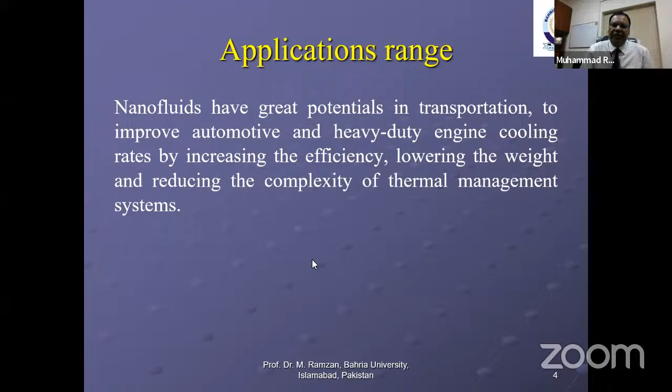If we talk about the preamble, common fluids such as water, ethylene glycol, and oil play an important role in heat transfer in many industrial processes such as power generation, heating or cooling processes, chemical processes, and microelectronics.

These fluids—water, ethylene glycol, oil—we name as the base fluids. These have relatively low thermal conductivity and thus cannot reach high heat exchange rates in thermogenic devices. So a way to overcome this barrier is to use ultra-fine solid particles suspended in these common fluids to improve their thermal conductivity. So what we actually do is put metallic particles of nano size into the base fluid to increase its thermal conductivity.

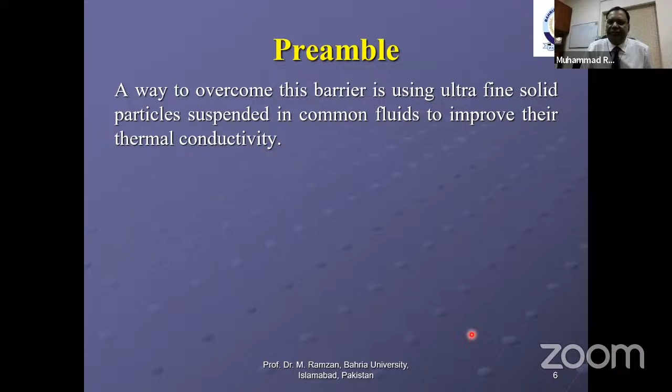The enhanced thermal behavior of nanofluids could provide a basis for numerous innovations for heat transfer intensification, which is of great importance to a number of industrial sectors, including transportation, power generation, micro manufacturing, thermal therapy for cancer treatment, chemical and metallurgical sectors, as well as heating, cooling, ventilation, and air conditioning.

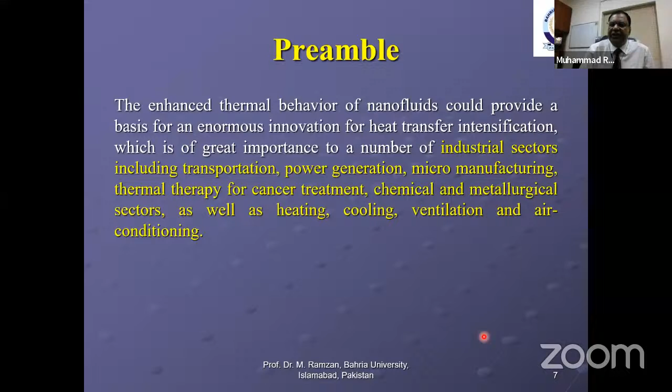Nanofluids are also important for the production of nanostructured materials for engineering of complex fluids, as well as for cleaning oil from surfaces due to their excellent wetting and spreading behavior. Another application of nanofluids is the delivery of nanodrugs.

The research opportunities in nanofluids will obviously be more attractive for newcomers who are interested in this area.

So what is a fluid? A fluid basically is a substance that is capable of flowing. It has no definite shape of its own. Both liquids and gases are fluids. Examples of fluids are water, milk, petrol, honey, and air. So in simple words, we can say a substance that has no specific shape and can yield easily to external pressure is called a fluid.

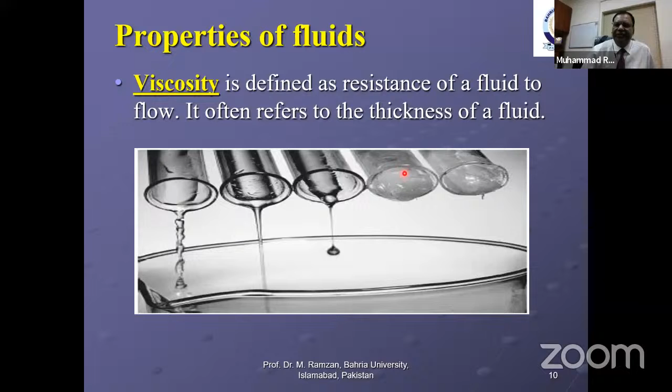Then the density of a substance - the relationship between the mass of a substance and how much space it takes up, meaning the volume. Fluids that do not mix layer themselves according to their density. Less dense fluids float on top of more dense ones. As you can see here, the oil is less dense compared to water, so it is floating on top. So an object made from a comparatively more dense material, let's say iron, will have less volume than an object of equal mass made from a less dense substance such as water.

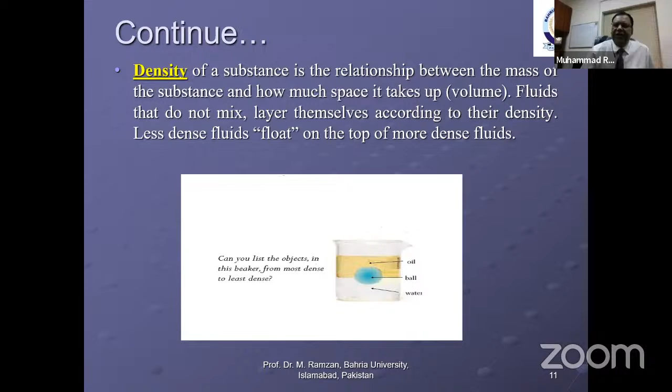Then thermal conductivity. Thermal conductivity of a material describes how well the material conducts heat. To understand this, we need to learn what thermal conduction is. Thermal conduction is a phenomenon where heat is transferred from the area of high temperature to the area of low temperature due to the motion of the constituents of a substance, such as atoms, molecules, free electrons, while the object itself does not move. In simple words, thermal conductivity is the ability of a material to conduct heat - how much heat the material can conduct. This is what thermal conductivity is.

The factors that affect thermal conductivity: first is the material - what kind of material we are discussing can affect the rate of energy flowing between two regions. From the left side, let's say if heat is moving from left to right, if the material is more conductive, the heat will transfer more rapidly, otherwise it will be at a slow rate. The length of the material is also a main factor affecting thermal conductivity. Then the temperature difference between the two ends of the material. And then the cross section type - if it's a small cross section, heat will flow more rapidly, and if it's a bigger cross section, it will be a little slower.

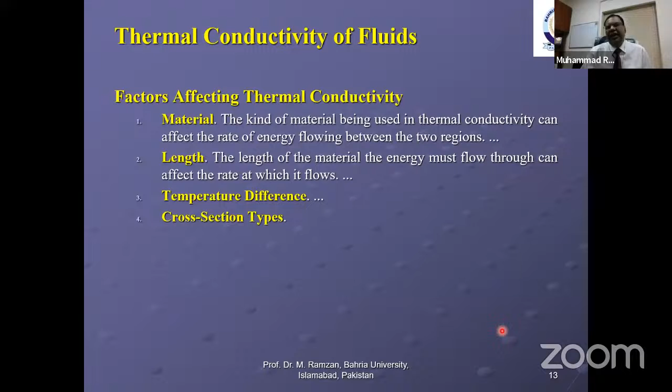So in simple words, solids have more thermal conductivity than liquids, and liquids have more thermal conductivity than gases.

So if we talk about the timeline of the emergence of nanofluids: in 1981 in America, Tuckerman introduced microchannel technology. Later in 1985, Argonne National Lab in the United States started a program to develop advanced fluids. This journey continues until 1993.

Masuda et al. measured the thermal conductivity and viscosity of three different water-based suspensions containing aluminum oxide, titanium oxide, and silicon oxide nanoparticles. They reported that both the thermal conductivity and viscosity of the water became greater than before adding the nanoparticles. This was a big success at that time in 1993 - they found that when we insert oxides or nanoparticles into the base fluid, the thermal conductivity is enhanced.

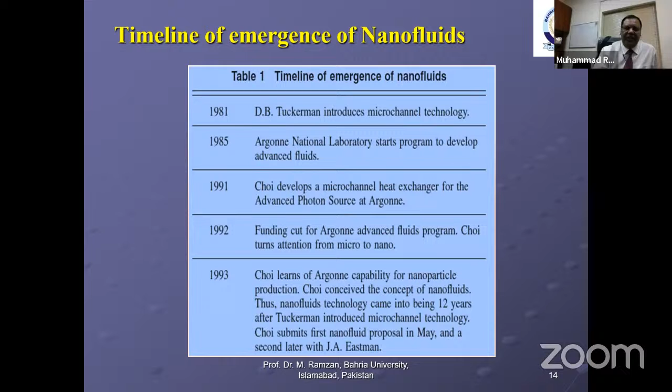This journey continues, and in 1994 to 97, a proposal leads to funding for the first nanofluid project. Then in 1995, Choi presents a seminal paper on the concept of nanofluids. And in year 2000, President Clinton announces the National Nanotechnology Initiative. At this stage, they recognized the effectiveness of nanofluids.

Based on the concept of nanofluids, Argonne thermal scientists have developed an advanced cooling technology. The approach relies on many microchannels consisting of long, narrow slits and coolants containing nanometer-sized metallic particles. In other words, the innovative process implies microchannels filled with metallic nanoparticle-laden coolant to extract heat faster than present technology.

This was a big step forward, and the year 2000 was the start of nanofluids research. Then in 2007, the first single-theme conference on nanofluids was held, which made the base for today's research on nanofluids. So it's not as old a field - from 2000 onwards it's 22 years, and if you talk about the proper start of nanofluids development, it starts from 2007 onwards.

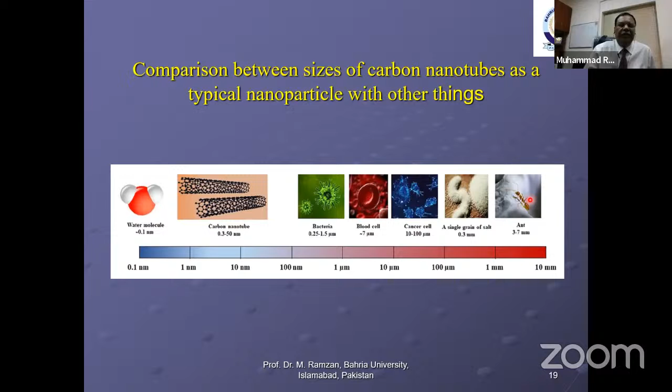As already mentioned, nanoparticles may be made of aluminum oxide, zirconium oxide, silicon dioxide, copper oxide, gold, copper, or carbon nanotubes.

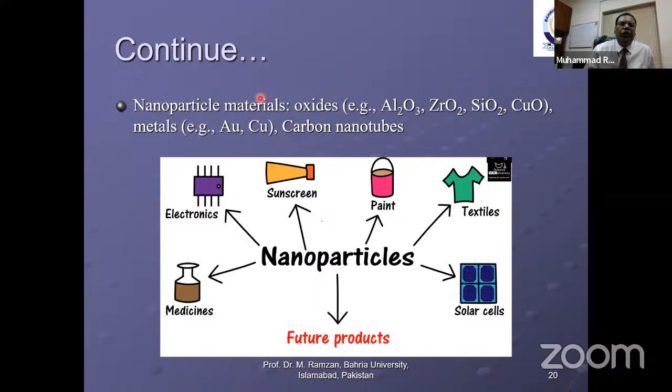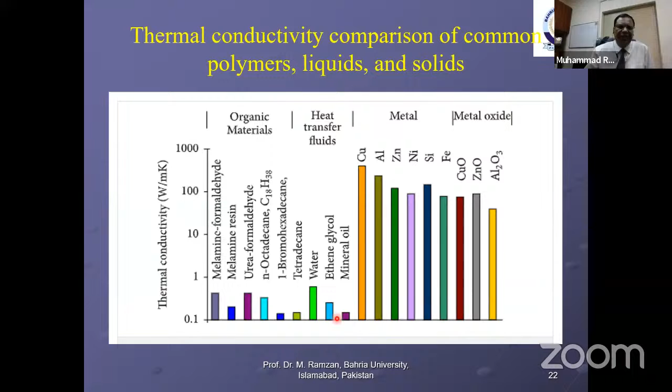You will see a similar comparison here - these are the base fluids: water, ethene glycol, and mineral oil, and these are the thermal conductivities of copper, aluminum, zinc, nickel, and the rest of the materials. So you can see a comparison of thermal conductivity.

The most fascinating nanoparticle is the carbon nanotube, made from graphene sheets. Graphene sheets are used for anti-corrosion coatings and paints, efficient and precise sensors, faster and efficient electronics, flexible displays, efficient solar panels, faster DNA sequencing, drug delivery, and more.

Here are the sheets made from graphene. The first type is named the single-wall carbon nanotube, and the other is named the multi-wall carbon nanotube. A sheet of graphene one atom thick is rolled into a tube like this, creating a single-wall carbon nanotube.

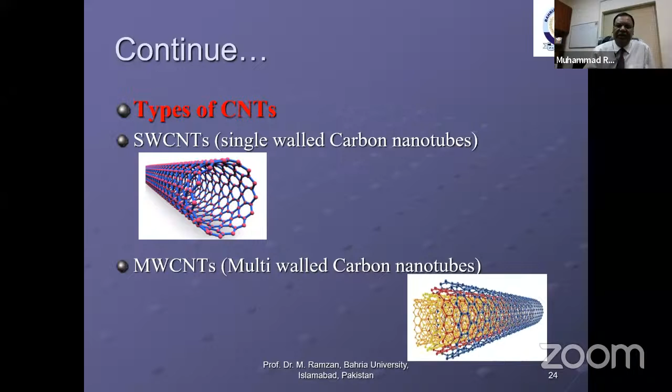The method involves combining a metal catalyst with carbon-containing reaction gases, and as a result, carbon nanotubes are formed on the catalyst within a furnace at high temperature.

The characteristics of carbon nanotubes: they are as stiff as diamond, have 1/4 the density of steel, are 10 times stronger than steel, and have thermal capacity 20 times more than steel. Carbon nanotubes are elastic and good conductors of heat, possess good electrical conductivity, and resist corrosion.

Bicycle frames, tennis rackets, hockey sticks, and bulletproof jackets are being made from these graphene sheets. By use of carbon nanotubes, the weight of aircraft is reduced by 30% - a big achievement. Carbon nanotubes are also used in electronic gadget miniaturization.

You can see the gadgets that we use on a daily basis are getting smaller and smaller, and this is because of the small gadgets being used in these electronic devices. In these gadgets, basically graphene sheets are being used.

So instead of wearing vests made of steel panels, people would start to increase their usage of carbon fiber bulletproof vests. Carbon fiber is not only stronger than steel, it's also lighter. This is because carbon fiber is very durable and also very rugged as a material.

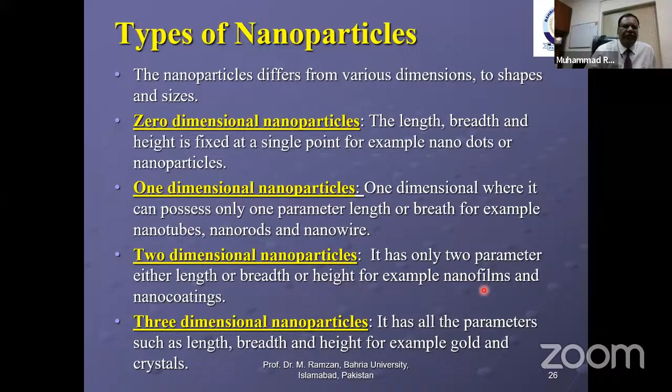Carbon nanoparticles of zero dimension have no length, breadth, or height, fixed at a single point - for example, carbon dots. One dimension is where only one parameter, length or breadth, is present - examples are carbon nanotubes, carbon nanorods, or carbon nanowires. Two-dimensional means breadth and length, like nanofilms and nanocoatings, and three-dimensional are crystals.

Shapes of nanoparticles may be different - spherical, needle, octahedral, cluster, platelets, flower, triangular - almost every shape we can imagine. Basically, every shape has different characteristics. For example, plated shape nanoparticles carry maximum velocity, whereas brick shaped nanoparticles are best to enhance thermal conductivity, and spherical nanoparticles are a good option for drug delivery.

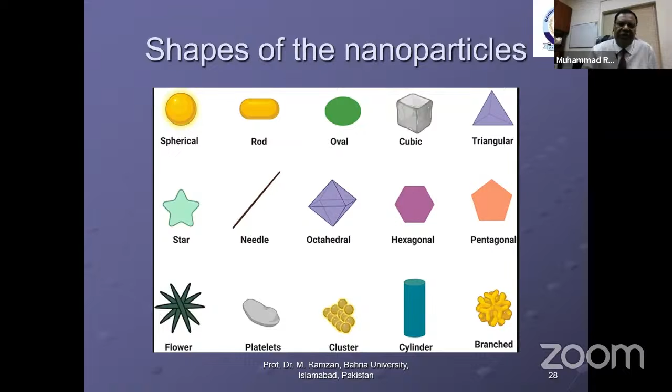Preparation of nanofluids: nanofluids are not simply made by adding nanoparticles into water or a base fluid and stirring the mixture, similar to mixing sugar in tea. Rather, the formation of nanofluid requires special physical and chemical processes in order to produce uniform and efficient dispersion of particles for long-term applications. So it's not simply mixing the nanoparticles into the base fluid.

Nanofluids can be produced by two methods: the one-step method and the two-step method. In the one-step method, a single step simultaneously makes and disperses the nanoparticle directly into the base fluid - making and dispersion happen at the same time. In the two-step method, you start by producing the nanoparticle first and then dispersing it into the fluid.

Here is the pictorial diagram. You can see this is the single step method, simultaneously making and dispersing the nanoparticles into the base fluid. And here is the two-step method - first the nanoparticle production, then adding the base fluid.

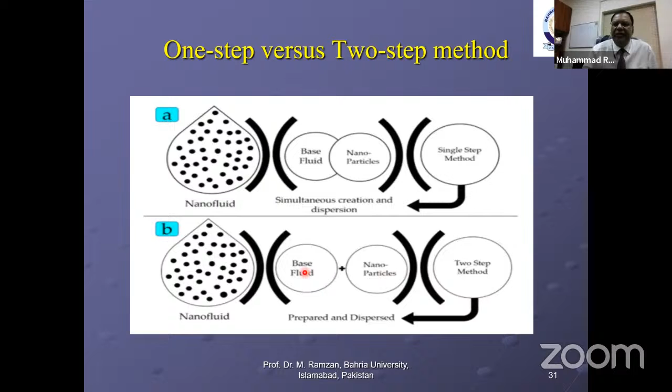The two-step method is the most widely used method for preparing nanofluid. During the two-step method, the produced nanomaterials are directly dispersed into the base fluid with the help of a dispersing device, such as a magnetic stirrer, homogenizer, or by using ultrasonic devices like an ultrasonic bath or ultrasonic processor. So you need to use some machinery at high temperature to make the nanofluids.

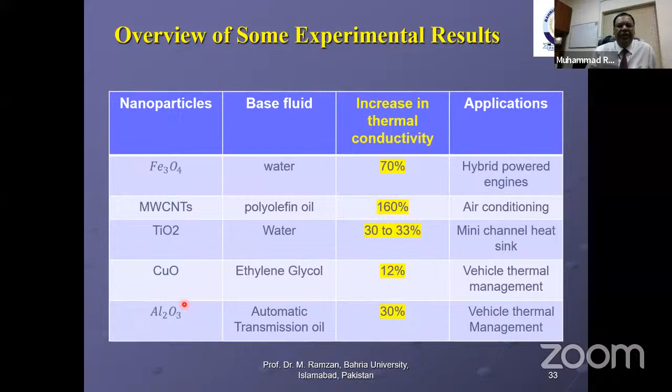Similarly, the multi-wall carbon nanotube used in polyolefin oil increases the thermal conductivity by 160%, and these are being used in air conditioning. As you can see, the application in mini channel heat sinks and vehicle thermal management shows a 12% increase. These are different experiments - one gives a 12% increase, another with different nanoparticles gives a 30% increase.

Here is another example taken from another paper showing enhancement in thermal conductivity - you can see 40%, 45% like this one. These are the particles, and these are the base fluids. This is the size used, and this is the volume fraction of the nanoparticle used to make the mixture. These are the papers we have referenced.

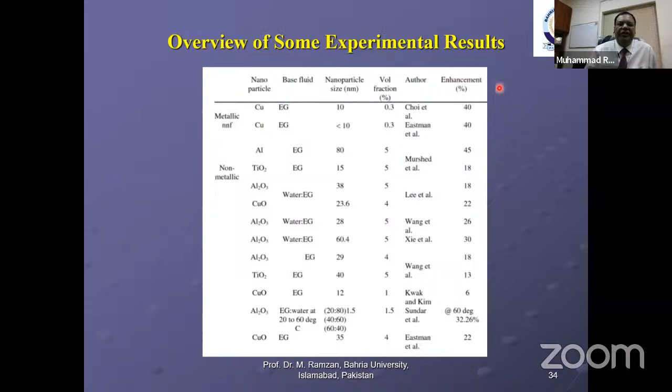You can see here how much, when copper and ethylene glycol with nanoparticles of 10 nanometer size and 0.3% copper is added, you get a 40% increase in thermal conductivity, and the rest you can see over here as well.

So the parameters that affect the thermal conductivity of fluids include the volume fraction - how much amount of nanoparticles we pour into the fluid - the particle size, the particle shape (as earlier told, brick shape, plate shape, star shape, spherical, and many more shapes), the particle material - what kind of particle we are using - the base fluid, the temperature at which the experiment is conducted, and the effect of acidity, that is pH, potential of hydrogen. All these parameters affect the thermal conductivity of the fluids.

Here you can see the volume fraction effect: a 6% volume fraction of copper oxide nanoparticle in distilled water suspension resulted in an increase of effective thermal conductivity to 1.52 times that of pure distilled water. So insertion of copper oxide with a volume fraction of 6% will increase it 1.52 times as compared to simple distilled water.

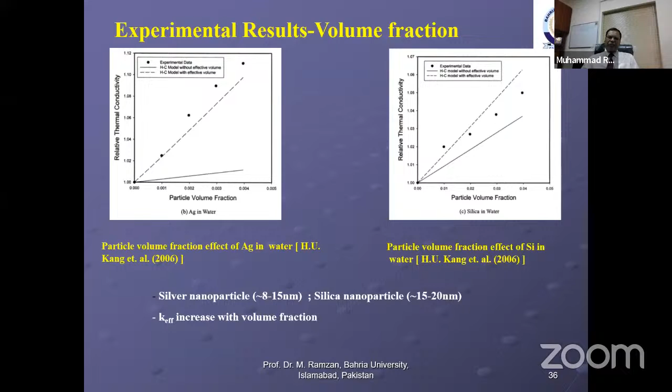In another experiment, pure distilled water with 10% aluminum oxide nanoparticle increased thermal conductivity 1.3 times compared to the original distilled water, at normal temperatures around 34 degrees Celsius.

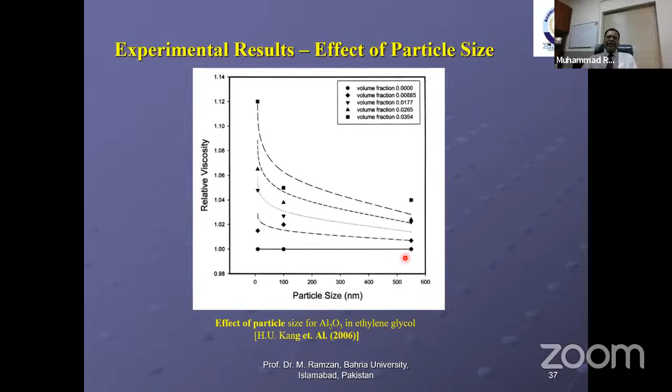This is the effect of particle size. Smaller particles have higher thermal conductivity - effective surface area increases as particle size decreases, and there's increment due to Brownian motion, with an exponential increase as the size gets smaller. So if the particle size is getting smaller, this will affect the thermal conductivity of the nanofluid.

This also affects the particle shape. As I told you, plate-shaped nanoparticles carry the maximum viscosity. Brick-shaped nanoparticles are best to enhance thermal conductivity, and spherical shapes are best for drug delivery.

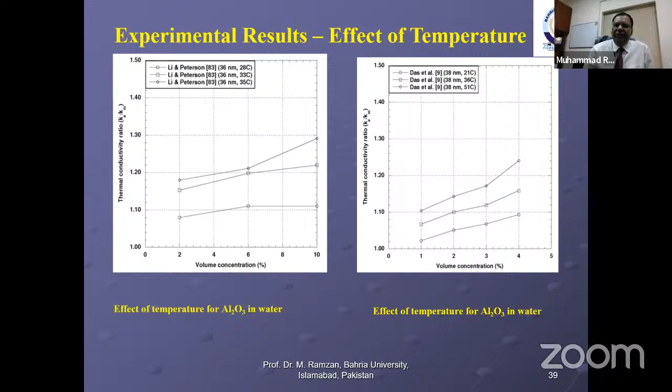The temperature at which the experiment is conducted is also one of the factors affecting the thermal conductivity of the fluid. A temperature increment reduces the viscosity of the nanofluid and promotes Brownian motion - at the same volume fraction, higher temperature gives higher thermal conductivity. There's a 7 to 10% increment for the temperature range from 28 to 35 degrees Celsius. If we increase the temperature from 28 to 35 degrees Celsius, the increment in thermal conductivity will change from 7% to 10%. Here is another graph showing the effect of temperature on the nanofluids.

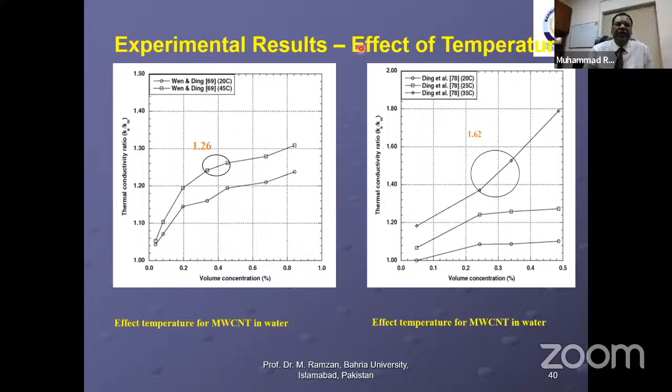Now, if we talk about the characteristics of nanofluids: higher heat conduction due to large surface area, which allows more heat to conduct. The stability problem of sedimentation is solved because the particles are small and weigh less, so the chances of sedimentation are much lower. Earlier, millimeter or micrometer particles were used to enhance thermal conductivity of the base fluid, but with the invention of nanoparticles, this stability problem has been resolved to some extent. It also reduces the chances of erosion.

Nanoparticles are very small, hence the momentum they impart on the solid wall is very small. This reduced momentum reduces the chances of erosion of components such as heat exchangers, pipelines, and pumps, and they reduce pumping power. In case of nanofluids, the required increase in pumping power will be moderate.

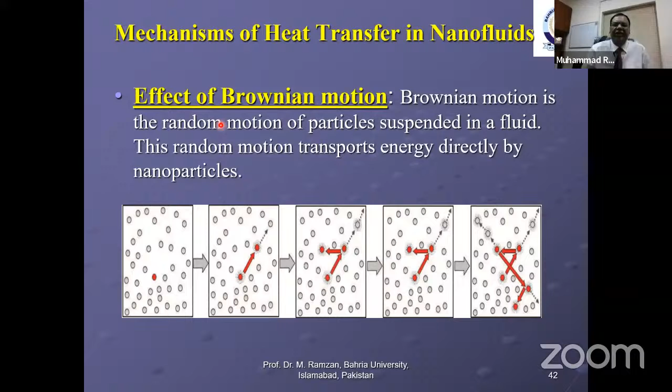Now, the effect of the Brownian motion mechanism on heat transfer in nanofluids. Brownian motion is the random motion of particles suspended in a fluid. This random motion transports energy directly by the nanoparticles, which is basically the function conducted when nanoparticles are poured into a liquid. Clustering of nanoparticles results in fast heat transport along relatively long distances, so when nanoparticles are clustered, heat travels more rapidly.

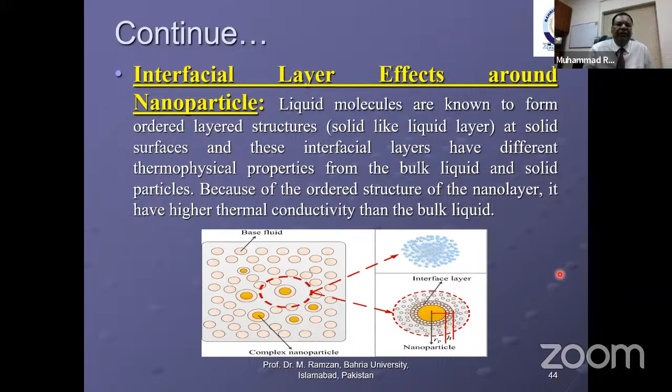Interfacial layer effects around the nanoparticle: liquid molecules are known to form an ordered layer structure at solid surfaces, and these interfacial layers have different thermophysical properties from the bulk liquid and solid particles. Because of the ordered structure of this nanolayer, it has higher thermal conductivity than the bulk liquid.

Coming to a more interesting aspect for the audience: the applications of nanofluids. The depletion of fossil fuels and environmental considerations motivated researchers to use alternative energy sources such as solar energy. Therefore, it is essential to enhance the efficiency and performance of thermal systems, so nanofluids are being used in solar panels to enhance their efficiency.

In antibacterial and antifungal applications, nanoparticles can sometimes be used for antibacterial activities or drug transmission properties. It is observed that surface modification of hematite nanoparticles makes them suitable for antimicrobial applications as well as for other biomedical studies.

Despite continuous improvement of fungal-targeted approaches, a considerable number of therapy-associated obstacles, including poor penetration of some drugs and development of drug-resistant strains, limit the effectiveness of fungal therapies. This growing body of research demonstrates that many of these limitations might be overcome using new nanotechnology-based agents and strategies. To date, a variety of nanomaterials, including biodegradable polymeric and copolymeric based structures, metallic nanoparticles, metallic nanocomposites, and lipid-based nanosystems have been thoroughly investigated and presented as innovative antifungal agents.

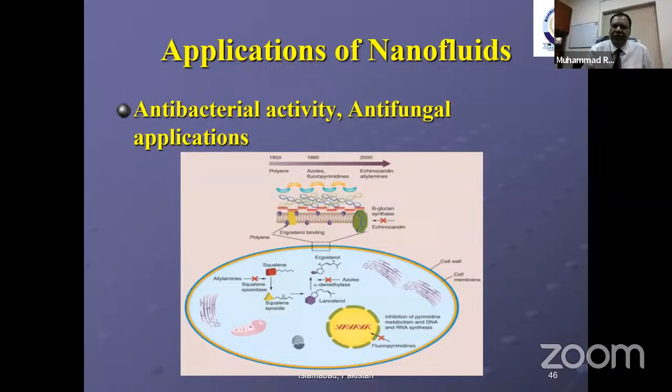A substantial advantage of nanomaterial-focused therapies is the possibility of administering these agents through oral, nasal, parenteral, and intraocular routes, which is possible due to the small size of the nanoparticles.

Nano cooling is one of the innovative technologies used to enhance heat transfer in automotive car radiators by using a new type of coolant called nano coolant. In a few countries where the temperature goes below 0 degrees Celsius, nano coolant made from ethylene glycol, or the ethylene family, is used as a base fluid with nanoparticles, because the freezing point of ethylene glycol is minus 12 degrees Celsius.

So nanocoolants are quite effective in countries for automotive use when the temperature is below 0 degrees Celsius.

In industrial cooling, one project that employed nanofluids for industrial cooling could result in great energy savings and emissions reductions. For United States industry, replacing cooling and heating water with nanofluids has the potential to conserve 1 trillion BTU of energy. For the United States electric power industry, using nanofluids in closed loop cooling cycles could save about 10 to 30 trillion BTU per year, equivalent to the annual energy consumption of 50,000 to 150,000 households. The associated emissions reduction would be approximately 5.6 million metric tons of carbon dioxide, 8,600 metric tons of nitrogen oxides, and 21,000 metric tons of sulfur oxide.

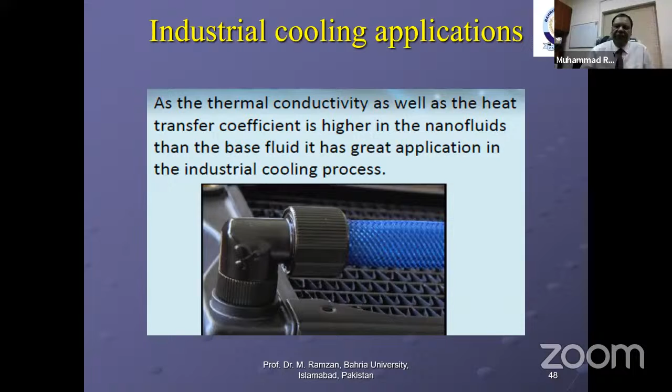Nanofluids are also used in aerodynamics, looking for ways to improve the aerodynamic designs of vehicles and subsequently fuel economy. Manufacturers must reduce the amount of energy needed to overcome wind resistance on the road. At high speed, approximately 65% of the total energy output from a truck is expended overcoming aerodynamic drag.

This is partly due to the large radiators positioned in front of the engine to maximize the cooling effect of the oncoming air. The use of nanofluids as coolants would allow for smaller size and better positioning of the radiators, owing to the fact that less fluid is needed due to higher efficiency. Coolant pumps could be shrunk and truck engines could be operated at higher temperatures, allowing for more horsepower while still meeting stringent emission standards.

Cooling of the nuclear reactors. Many water-cooled nuclear power systems are CHF-limited, but applications of nanofluids can greatly improve the CHF coolant, resulting in bottom line economic benefit while also raising the safety and standard of the power plant system.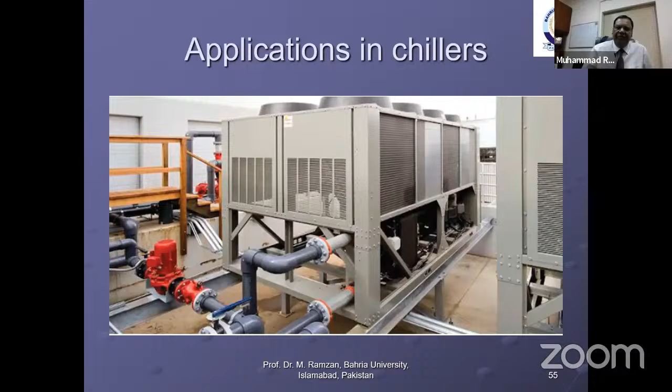Medical applications: nanofluids and nanoparticles have many applications in the biomedical industry, but there are some side effects in traditional cancer treatment methods.

Iron-based nanoparticles could be used as delivery vehicles for drugs or radiation without damaging nearby healthy tissues. Such particles could be guided through the bloodstream to a tumor using a magnetic field external to the body.

Nanofluids could also be used for safer surgery by producing effective cooling around surgical regions, thereby enhancing the patient's chance of survival and reducing the risk of organ damage.

Magnetic nanoparticles in biofluids can be used as delivery vehicles for drugs and radiation, providing new cancer treatment techniques. Magnetic nanoparticles absorb much more power than microparticles in AC magnetic fields tolerable to humans, and nanoparticles are more adhesive to tumor cells than normal cells. Therefore, magnetic nanoparticles excited by an AC magnetic field are promising for cancer therapy.

There is a new initiative which takes advantage of the properties of certain nanofluids for use in cancer imaging and drug delivery. This initiative involves using iron-based nanoparticles as a delivery vehicle for drugs or radiation in cancer patients. Magnetic nanofluids are used to guide the particles through the bloodstream to the tumor with magnets.

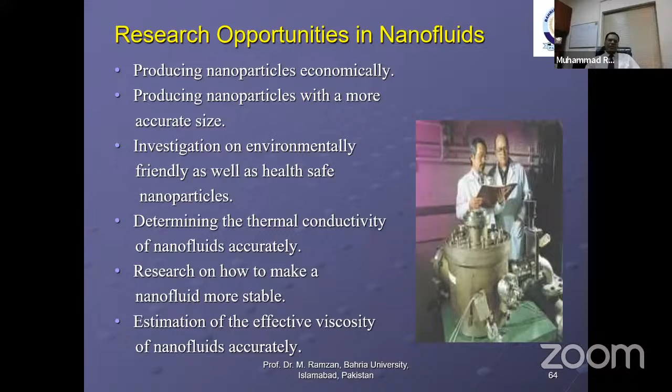Okay. The popularity of nanofluids can be gauged by looking at the amount of publication research in this field, and there is still more room for publication as well. So there is a big gap right now to answer the questions I've shown in the previous slide.

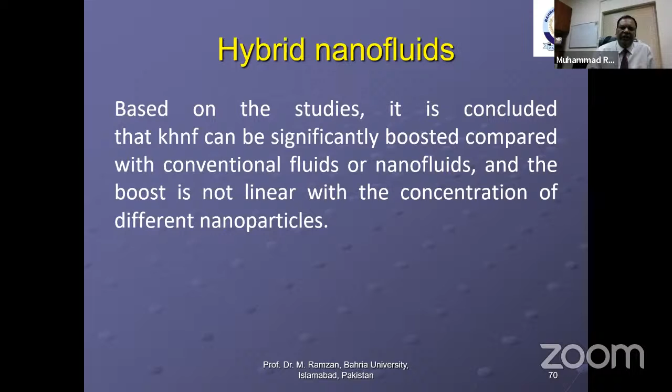Adding hybrid nanoparticles can significantly enhance the thermal conductivity of the base fluid, and studies show that using two particles in a base fluid results in more enhanced thermal conductivity compared to single particle insertion into the base fluid. So there is research right now showing people shifting from nanofluids to hybrid nanofluids.

Thank you. And if you have any questions, I can answer. One question: can we know what nanofluid can do in the agriculture field?

Yes, nanofluids are also being used in the agricultural area. You can just search on Google for the effectiveness of nanofluid in the agriculture area, and you can find a number of applications. If I remember, nanofluids can be used in agriculture for defrosting, or in storage of different fruits, since nanofluids are quite effective, and even in production of higher yields for crops, nanofluids are quite effective. I suggest you go on Google and search the effectiveness of nanofluids in agriculture, and you will find the answer to this question.

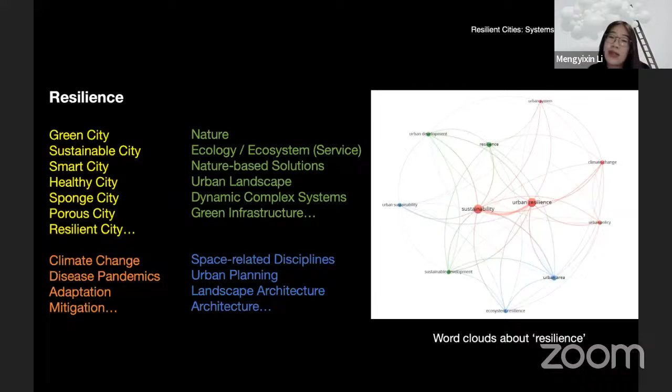The last one is resilient cities as used in the disciplines, absolutely the space-related disciplines, such as urban planning, landscape architecture, and also architecture. So I will give three contents in my lecture to explain this resilient city dynamic system of green open spaces. The first one is about resilient cities.

First, I will briefly introduce the backdrop: how could we, why could we see resilient cities as important. Then based on these backdrops, I will give the concept based on ecological meaning, and also the qualities — 7 qualities — to let you know exactly what the qualities of resilient systems are.

The second part is about the dynamic systems of green open spaces in the field of landscape architecture and urban planning. First of all, perspective is important, because we see many perspectives of resilient cities, but in our field, the landscape field or urban planning field, how could we see this word, and how could we connect green spaces into resilient cities to give the most influential power? Also the method is mentioned: landscape structure is the core element to explain open spaces.

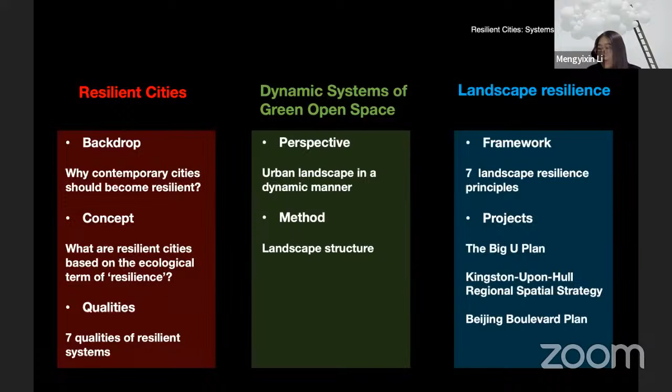One is from New York, the second is from the UK, and the last one is from Beijing, our university. We have tried research to explain resilient cities and give the meaning of green infrastructures. This Beijing Boulevard plan launched a study to show students the meaning of resilient cities.

Compared to this population density, we could see the green open spaces, which is very clearly shown in the map. In these three cities, green spaces especially act as a medium to give the city a chance to breathe.

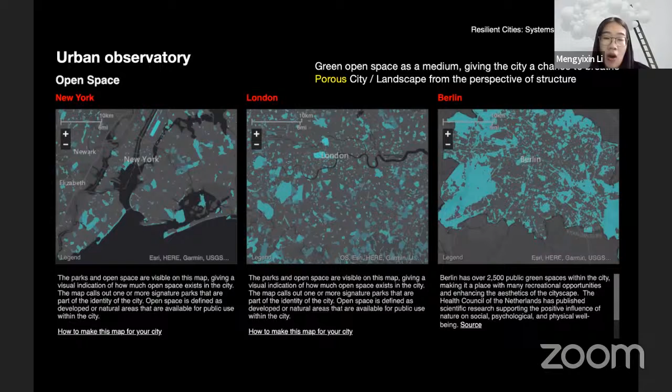We can compare these two pictures, this one and this one. The green open spaces act like a green sponge or green structure to support the city in having good functionality. From this perspective, we could see cities like porous cities - that's where the term 'porous city' comes from. From the landscape architecture perspective, this structure explains why the city needs systems of green open space, and these spaces are also connected with resilient cities.

Based on the image I've shown you, world cities and towns are more densely populated and more interconnected than ever before. That's why we need a new concept or new technologies to give it meaning. We also require models of governance that mitigate risk and respond to these evolving changes. As the city evolves constantly, the problems compared with the city also evolve - so those are the challenges or risks I want to show you.

Cities have faced many risks. Even though many cities in the past have demonstrated their resilience in the face of resource shortages, climate change, disease pandemics, and natural hazards - especially floods, earthquakes, and fire disasters - these risks give challenges for the cities. How could we deal with this? This is the main topic that many experts around the world want to explain or address.

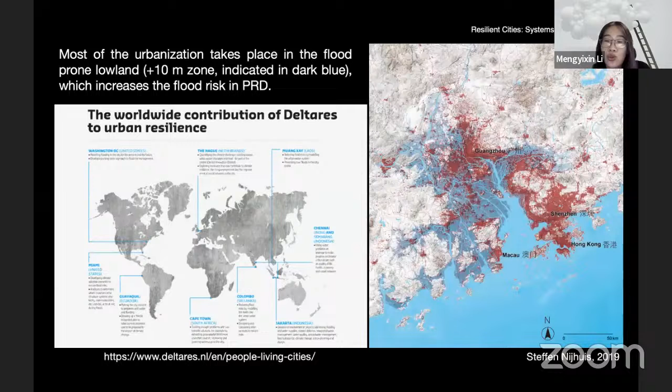From these pictures on the right, we could see that most urbanization takes place in this flood-prone, lower part. So it is very easy for the city to suffer from floods. The resilient cities programs may address these flood problems as the most important risk for these cities.

As well as this goal 11, we could also grasp some keywords from it: by 2030, we should provide universal access to safe, inclusive, and accessible green and public spaces. In goal 11 they mention this part, especially for women, for children, and for all urban residents to enjoy these green open spaces in resilient cities.

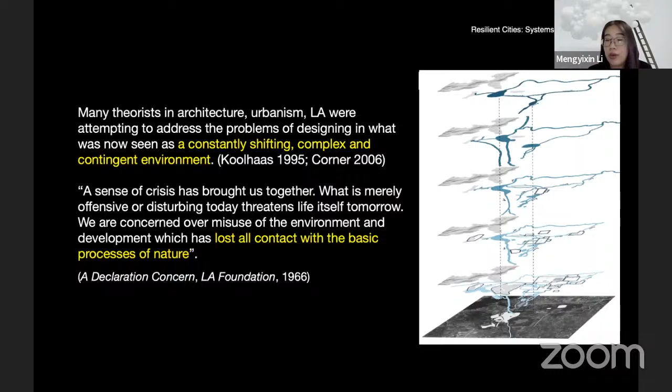So the next one is, I want to show you from the landscape architecture field, how could we see the resilient cities? We think we need to give our power to solving the problems as well as the environmental crisis. This profession is the main field to deal with the dependence of the environmental processes.

And also landscape should be understood. They have this power, or these capabilities, to let people know where is the nature and where is the resilient city. And the resilient city is a response to the changes. Now I have given the main keyword about the resilience, the concept of the resilient.

So inspired by Darwin's saying: it's not the strongest of the species that survive, nor the most intelligent, but the one most responsive to change. So the change is normal, as we have mentioned. So the resilient city is composed to this change.

So resilience is a term that emerged from the field of ecology in the 1970s. From that, the experts wanted to describe the capacity of the system to maintain and recover functionality in the event of disruption and disturbances. That's the origination of this keyword, and also this word was used to explain the complex systems, as well as cities constantly adapting to the changed environment. That's the process the keyword emerged from.

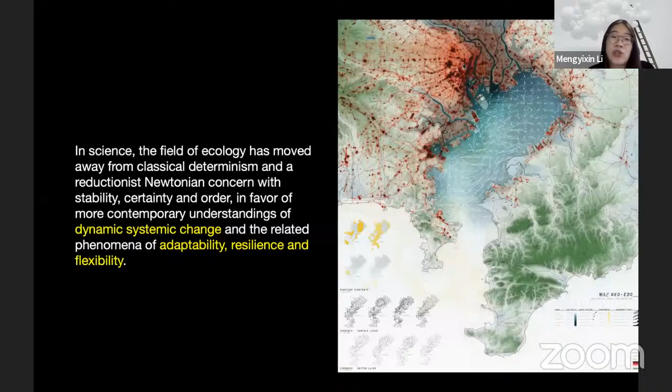So borrowing the idea from the ecological meaning, we need to know that dynamic systematic change is the normal thing. Related to this norm, adaptability, resilience, and flexibility are the three characteristics around resilience.

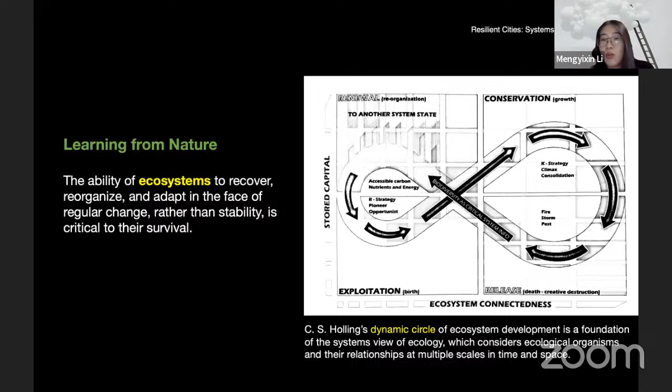So we need to learn from nature to find the ability of ecosystems to recover, to reorganize, and adapt in the face of regular change. That's why we need to learn this word.

So the cities also have the power to give their own abilities to recovery. From this urban resilience, we could see that is the capability of individuals, communities, institutions, businesses, and systems within the cities to survive, adapt, and grow, no matter what kind of disasters. So it's a process we need to witness.

And from this point of resilience, we could see some green cities, some green ways, systems of green open spaces have been established. An example from Germany: we could see in the map some national parks, some biological diversity hotspots, and also some natural enclosures have been built for the resilient cities. That is a connection between each other through the green open spaces.

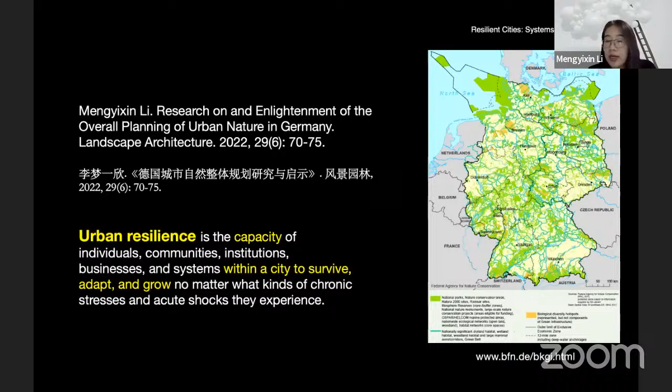We need to know the resilience goals. There are 12 goals in resilience that represent the qualities of resilient systems, including 7 parts: reflective, robust, redundant, flexible, resourceful, inclusive, and integrated.

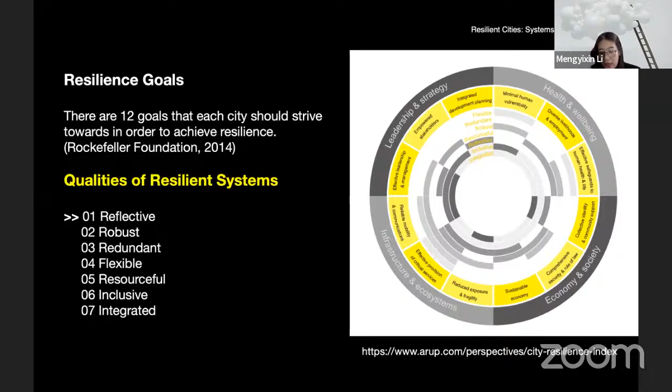I will give a brief explanation, because these circles were researched by the resilient city groups, but what is the specific meaning in our field of landscape architecture? I will give the connection between each other.

Reflective systems are accepting of the inherent and ever-increasing uncertainty and change in the world. Reflective also means people and institutions need to examine the past and learn from it. This is a good way for us to know what we have done and what we should do in the future. With this reflective way, we could mention China's urban regeneration.

Among the famous examples of reflective ways, we could mention Emscher Park in Germany. This system of green open spaces has demonstrated the critical reconstruction of urban landscape regeneration, in a rational, reflective, and process-oriented way. In our regional systems, green open spaces have been built for people to enjoy.

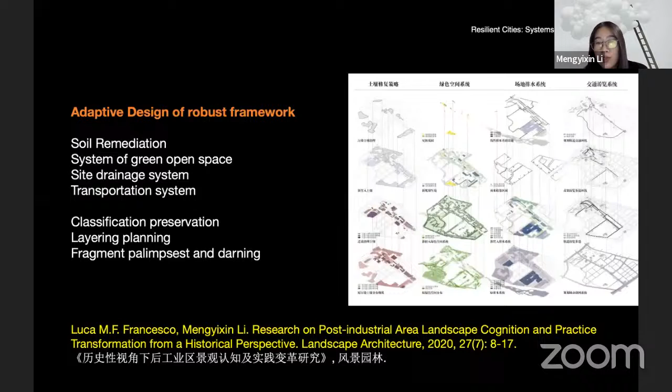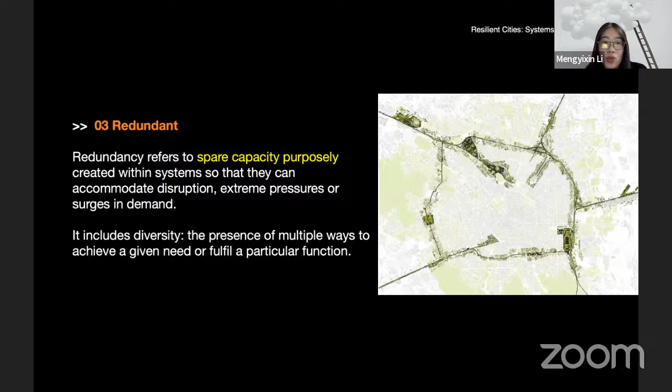The third one is redundant. Redundant means to spare capacities purposely in the city. We could find many green spaces in the city that need to be reserved for further development. This is a very important part of building systems of green open spaces, giving the city more blank space and more opportunities to form resilience.

And the fourth part is flexible. That is very, very important. It implies the system can be changed, can be evolved, and can be adapted in response to the changing environment. And also it should be introduced by new knowledge and technologies.

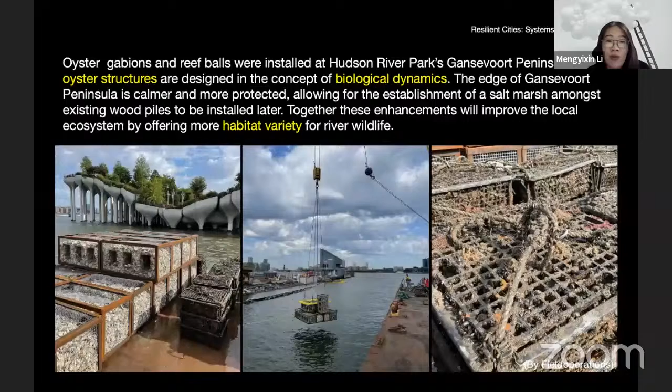We could find new ways to extend the city's flexibility. We could find some important projects, especially in New York City, like the oyster gabions and reef balls installed in the Hudson River parks. Along this park, we could find structures designed with the concept of biological dynamics, introducing biological elements and offering habitat varieties for the river wildlife. That is the new technology used for coastline cities.

And the fifth part is about resourceful. Resourceful means the people and institutions are able to rapidly find different ways to achieve their goals and meet their needs under risk. That is the normal way for foreign countries to use.

We could see from the New York High Line Park, an organization called Friends of the High Line has been organized. That is the representation of resourceful. It shows people can give their feelings, their words to decide what they want, how people could use these green spaces, and how post-industrial sites can be reused by the people to form new and liveable open spaces.

And the next one is inclusive. Inclusive is an essential approach that contributes to a sense of shared ownership or joint vision to build city resilience. We could say in this part, broad collaboration and engagement of communities, universities, design companies, and administration has joined together to contribute to a green open space establishment.

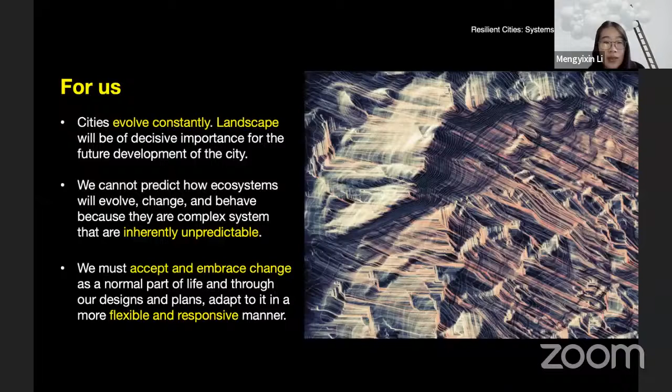And then the next part is the dynamic system of green open spaces, based on the first part. We need to think about how we can build cities and landscapes in resilient ways. We have seen many green space phenomena and elements in cities, whether gardens, water systems, natural landscape, post-industrial parks, river spaces, and the traditional hutong in Beijing.

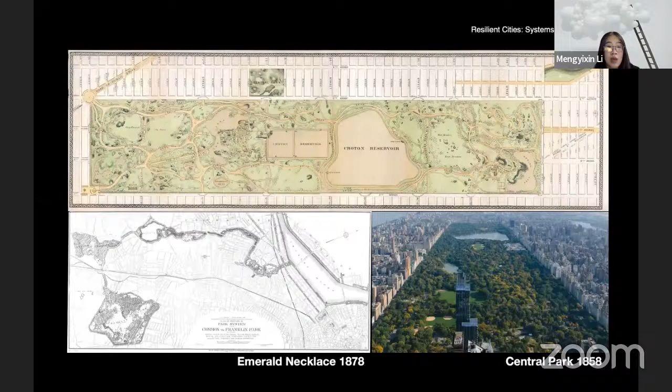But this is just the element. This is not the dynamic system of green open spaces. Green space is built by these elements, but not only by this — it is also by the ideal of green. This ideal of green has been demonstrated by park images, whether from Central Park in New York or the green system of the Emerald Necklace. These are also elements of green spaces, but also what we need, or what we should do, for processing these natural green systems.

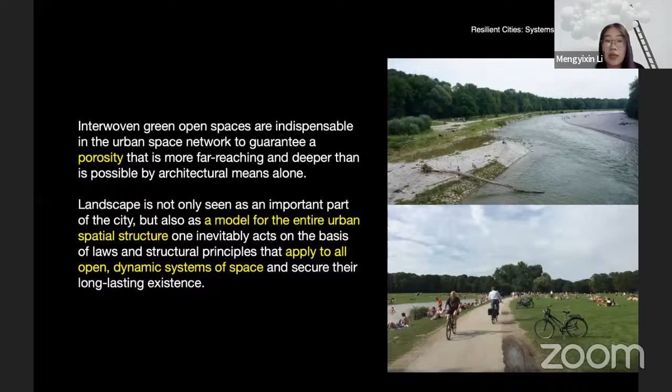And not only about that, we could also think about these green open spaces in terms of what is landscape. Landscape is not only a model for the entire urban spatial structure, but also an open dynamic system of spaces. That is the keyword I want to share with you.

From this concept of resilient structures, we can find the porous cities I have mentioned. Porous cities are the substantial quality of a structurally stabilized living environment, a phenomenon we see around us. These porous cities without structure cannot survive.

Structure helps the city exchange energy, matter, and information. It's like a circle, giving resilient cities more energy and making the city more powerful.

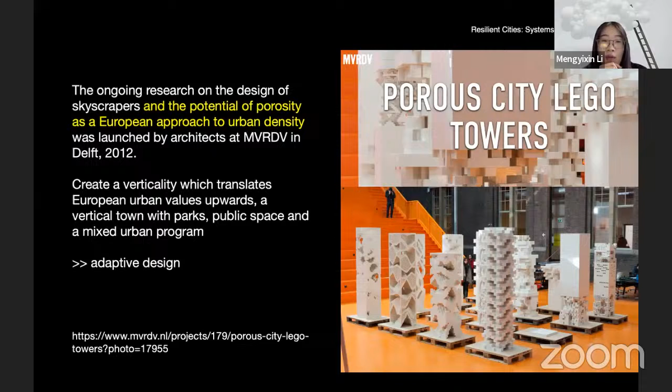These porous cities have also been discussed by architects, who show how they can be built in an architectural way. The vertical parts of buildings have been conceived by designers who want to combine parks, public spaces, and urban programs, built vertically to show the potential of these porous cities.

Porous cities also help us imagine the city. The city can be conceived through porous cities, which have many characteristics showing their qualities: interpenetration, superimposition, layers of spaces, integration, overlapping, and communication of spatial elements, as well as open spaces of processes with coincidence, rhythm, and time.

These characteristics explain porous cities and show the importance of structure.

For the system of green open space, we can define the critical concept by J.B. Jackson to explain why dynamic landscapes are very important in understanding cities. The landscape is not scenery; it is more than a collection, a system of man-made spaces on the surface of the earth.

We can see this landscape, but it is made by people. It is not only a feature of the natural environment, but also artificial and synthetic, always subject to sudden or unpredictable changes. That is J.B. Jackson's conception of urban landscapes.

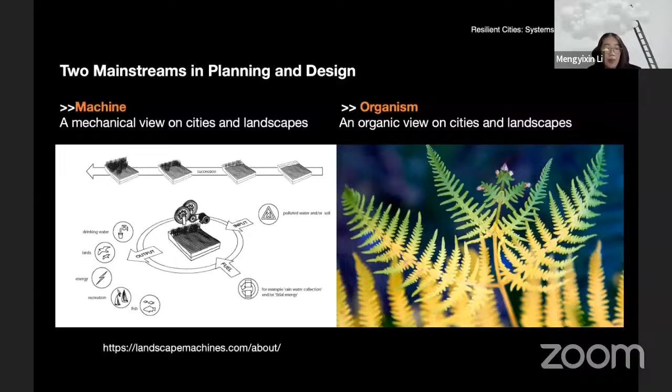I have also given you two ideas that have existed in the history of landscape architecture related to the resilient city. One concerns how ecological systems can be seen in a mechanical way, versus an organic view about cities and landscape.

From these two concepts, structure and landscape architecture can be found in green open space systems. How could we organize or analyze these green structures? We use a map in our research, similar to the Nolli map—a green Nolli map to show the structure. Each city has its own characteristics.

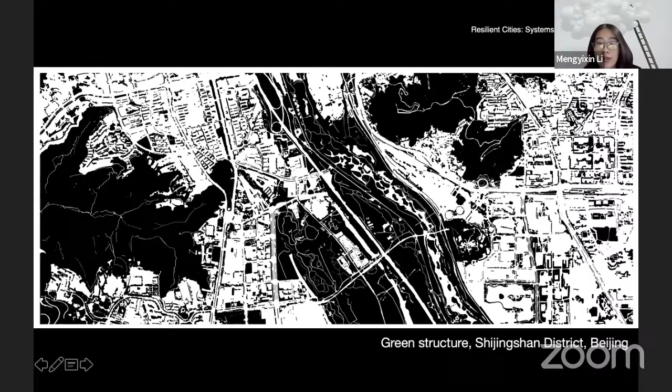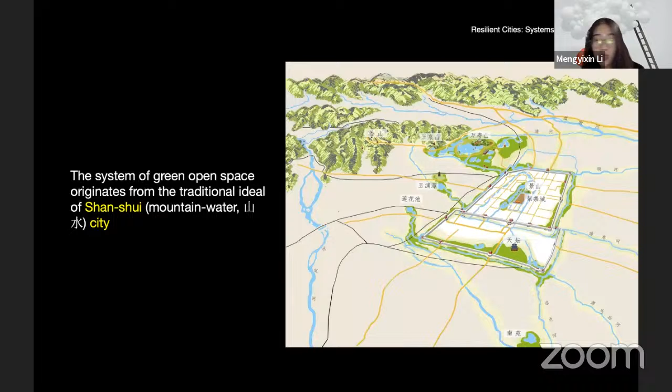For Chinese examples, the system of green open spaces can be seen in the Shan-shui city, the traditional urban landscape in Beijing. Compared with that, we can look at Munich, Germany, to see how this city developed as a metropolitan area, shaped by features like water and mountains.

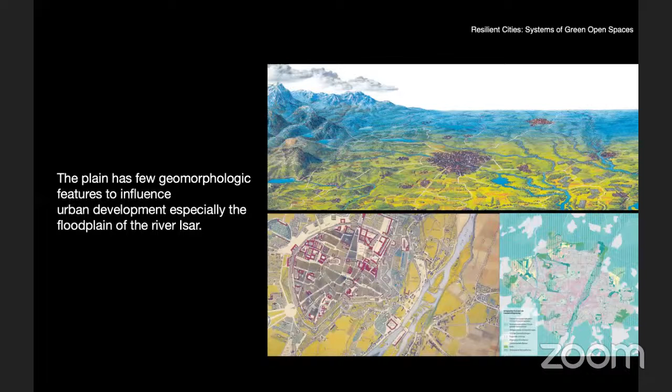And the last part is about landscape resilience. There are many things I want to share, but the time is limited, so I gave some keynotes so the students can later read and see what's the meaning I want to share with you.

The landscape resilience is based on the term of resilience. We could see landscape resilience also has the ability to reflect the sustainability of the desired ecological function, and also the biodiversity and the process over time. But it is also a system - no matter ecological, social or other sectors - it is always a system for us to consider.

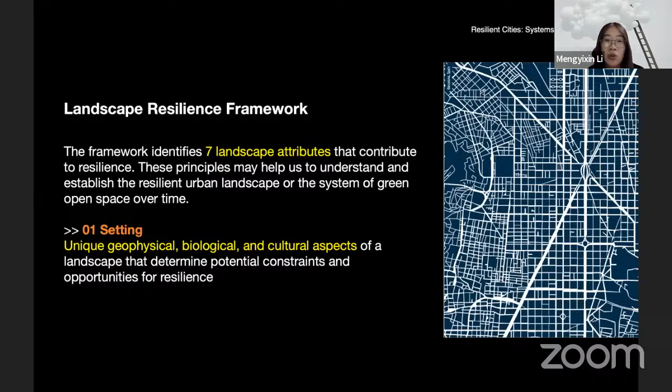So there are 7 contents I want to explain about how to build a landscape resilience framework. From setting - we have mentioned the setting is like the city's background. Every city has their own unique characteristics, their morphologies, their geography, and also their culture, which is so different. So the setting is important.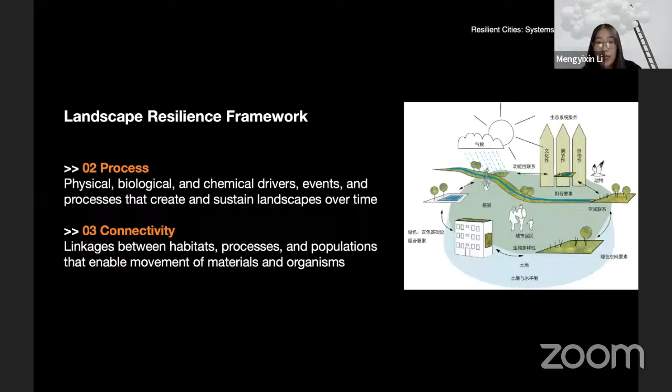The next one is the process. We could also think of nature as a process, so the city needs to follow the laws of nature, and also give the process of the city. The third is about connectivities - those connectivities give connection to each other, whether process or elements.

The fourth is about diversity and complexities. Complexity is originated from diversity - whether the programs, the social program, the city, the people's life, and others. Diversity is very, very important for a nation or for cities.

The next is redundancy. Redundancy, as I've mentioned, is about the space blank - we could give more room for nature to let it get involved for the future. So the next is the scale, and the last part is about the people.

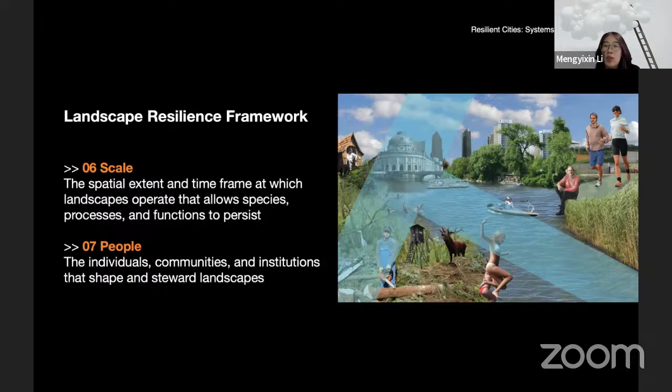The systems of green open spaces in the resilient cities are for every person to enjoy these spaces, and people have the right to give their ideas about what they want to do or what they want to see in the resilient cities.

So the next part is about the project I want to share with you. The first one is about New York, the Big U. That is a very famous project - I think that's one of the first famous projects I've known about regarding resilient cities.

So Rebuild by Design, that is a proposal for the competition for designers to give ideas showing how they considered New York City as well as its coastlines. This was mentioned by the BIG company - they gave ideas about what resilient cities could look like for the first time.

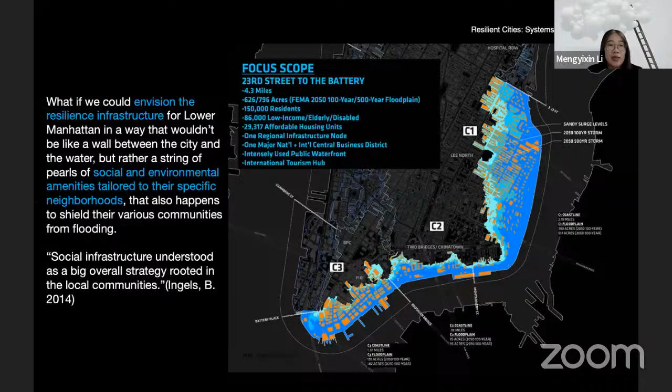They gave questions for everyone: what if we could imagine resilience infrastructure for Lower Manhattan not as a way to build a wall for the city, but instead to give social and environmental facilities to the specific neighborhood? They also gave many measures, like a toolkit, to add resilience infrastructure into social programs, letting people enjoy green open spaces rather than just defend the place.

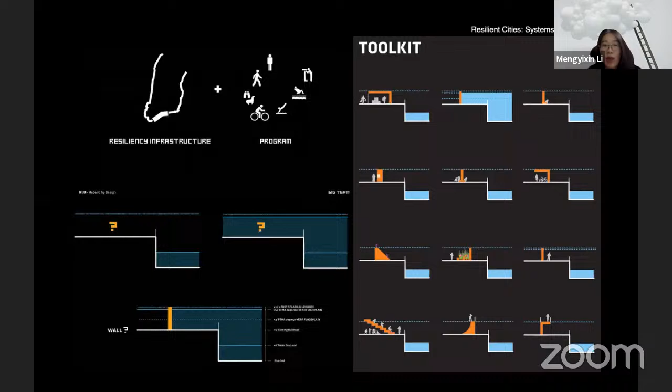So there are many forms for them to transform these coastlines. They have many ways in the program to show their diversities. And the next project I want to show you is from the UK - facing up to rising sea levels, how could we retreat, defend, or attack?

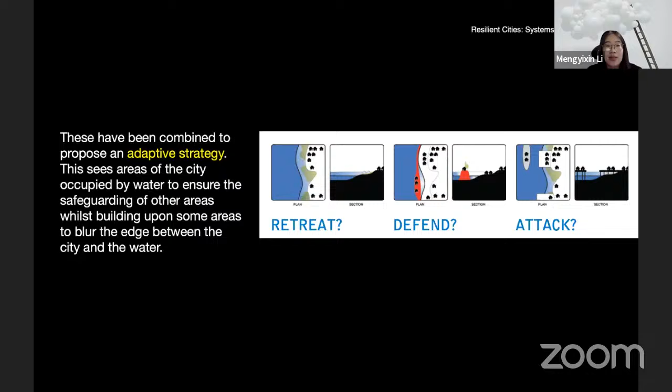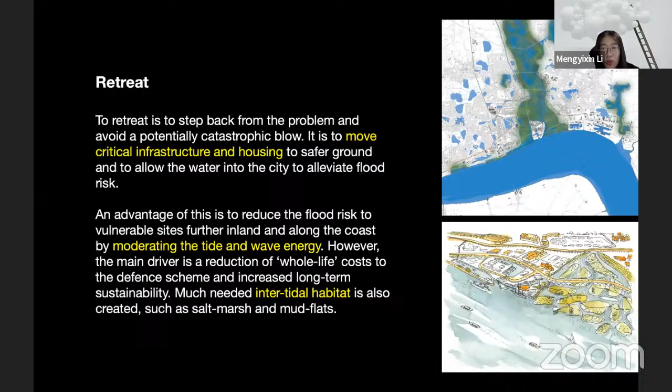There are three main approaches for cities to deal with resilient city transformations - these are also adaptive strategies. The first one is retreat: moving critical infrastructure and housing to let the river into the city. More importantly, how to moderate the tide and wave energies to let people know it's a river. We need to welcome the river, but we need to consider how to deal with this river tide transformation - that is the first approach.

The second approach is defend. We could say defend is the very normal way for us - we are familiar with it.

That is the insurance, the standards of protection away from the rivers and from floods, and also how this defense can be designed in a way that makes them economically and commercially viable. That is a key question for the defense. And also the attack is the ambitious way to build out the water. That is for the long-term benefits we need to consider.

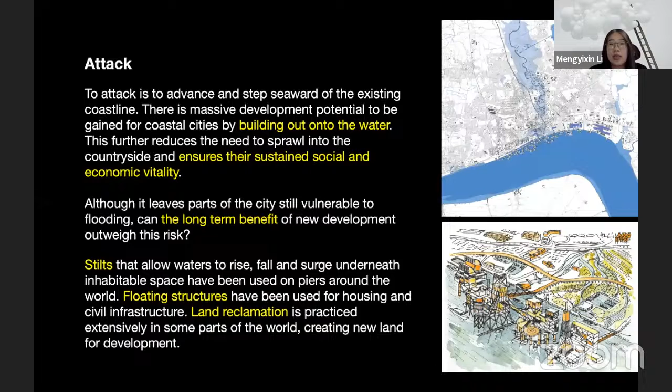The three approaches to organize this coastline are stilts, floating structure, and land reclamation for this part, giving these three ways. And according to these three ways, we could find the master plannings. They show different ways, and under these different approaches there are different master plans for us to have different connections between the water and the city.

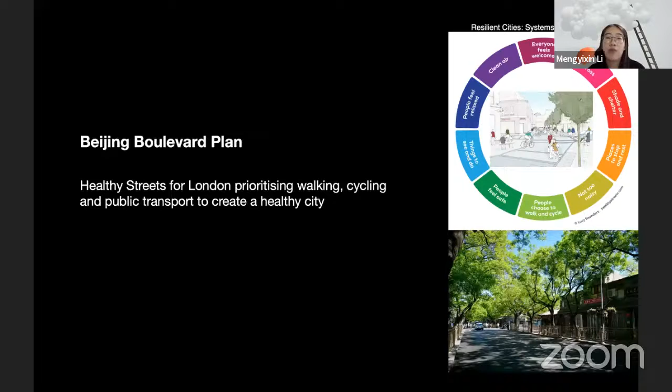The last one is about our research. I have presented this research in an international conference. That is the idea from the Healthy Streets in London. We worked with students together to research on these greenways, using the depth map, and also from three levels: the global system level, the mediating level, and the private levels, for characteristics of the healthy systems that has been built for the Beijing Xicheng district.

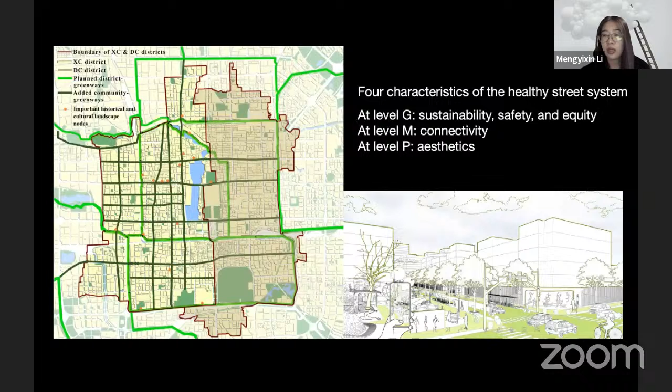We could find the greenways at the city, district, and community levels to construct a system of green open spaces. So the last part is a conclusion.

I will give several conclusions about how we could consider the resilient city. The first is about working with nature to foster resilient cities, emphasizing the natural processes in the city and also the cycles.

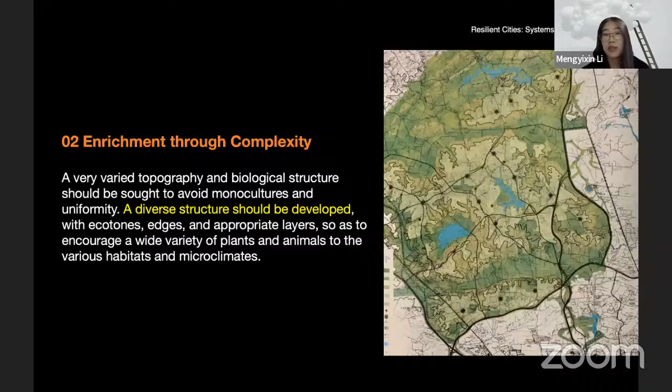The next one is enrichment through complexities. We need to construct diverse structures for the cities involved, as well as the green open spaces.

The next one is landscape as process. That concentrates on the ecosystem to give natural functions to the cities and help the cities evolve automatically, to have the landscape remain flexible and open to new development.

The next one is creativity on site. We need to use our ideas to build the connection between the city, the people, and also the soil and the plants, the biological materials.

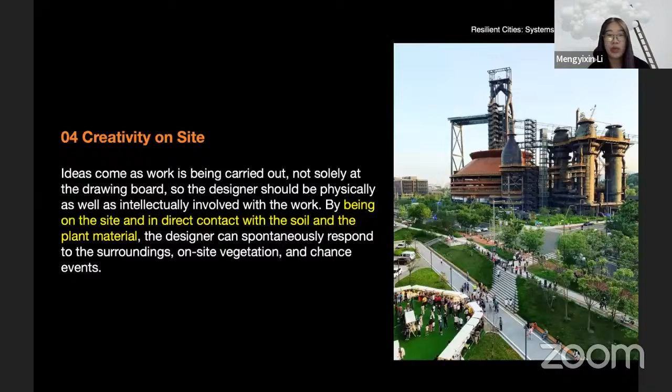The last one is involvement of the users. The voice of the normal people is very important. Everyone can have the right to have joint discussions with the public and also with the experts, and the designers become a social catalyst and also advisors for the public. So we just help them to know more, but the ideas can come from them.